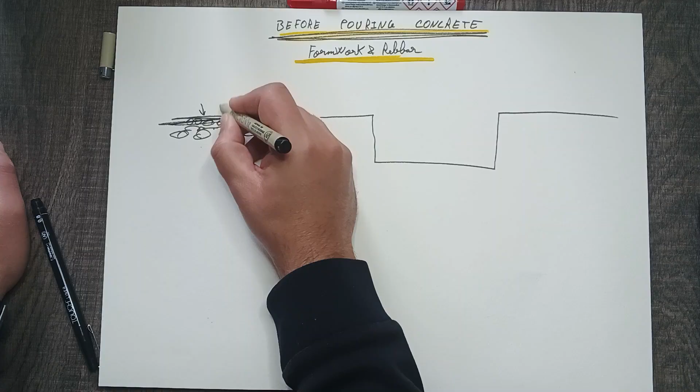After completing the excavation and reaching the required level, the soil must be properly compacted. A well-compacted soil provides a stable base for the foundation, reduces settlement, and prevents future structural problems. Only after checking the level, density, and cleanliness of the soil can we safely start with foundation works.

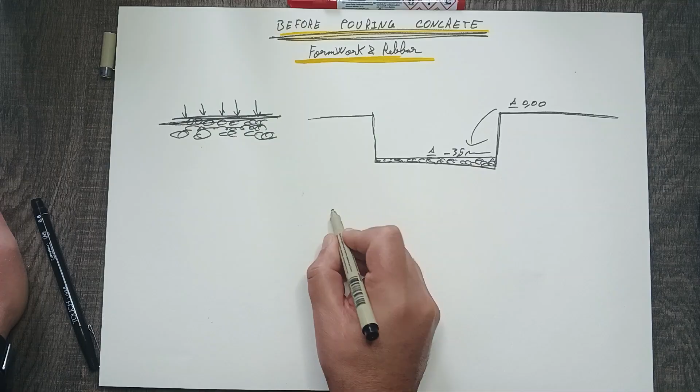This plan is composed of a main entrance that leads directly to the living area, which acts as the central space of the house. Near the entrance, we place the guest WC for easy access without disturbing the private zones.

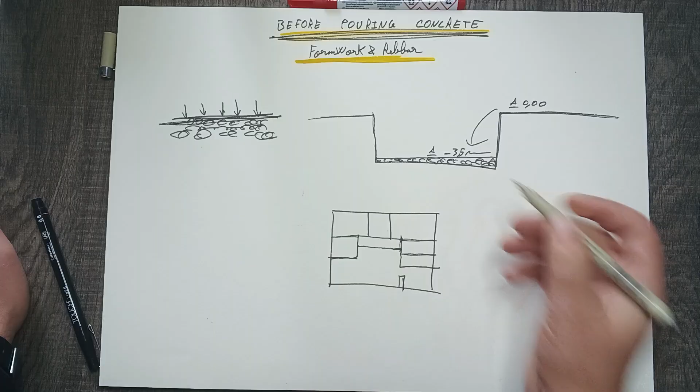A storage room is positioned close to service areas to improve functionality and circulation. The bedrooms are located in the private zone of the plan, away from noise and public spaces, ensuring comfort and privacy.

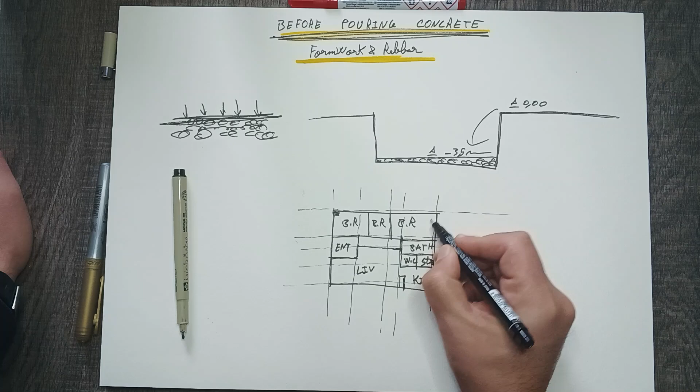From a structural point of view, the column layout is a key element in this plan. Columns are positioned to align with walls and functional spaces, avoiding interference with circulation and room usage. Their placement follows a clear structural grid defined by axes.

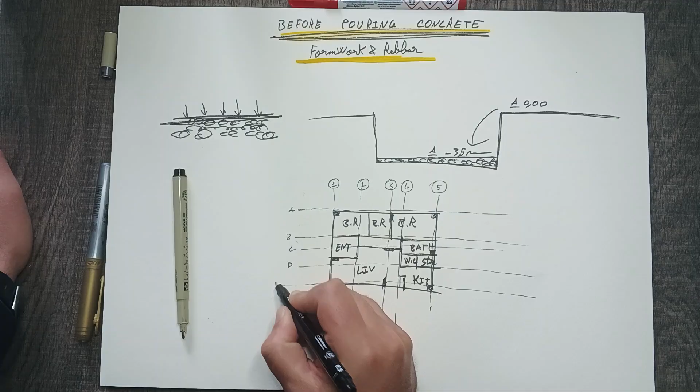These axes organize the plan, control spans, and ensure that loads are transferred efficiently from slabs to beams and down to the foundations. Respecting column alignment and axes is essential during the structural phase. Any change can affect stability, increase costs, and create execution problems on site. A well-coordinated architectural and structural plan guarantees safety, efficiency, and long-term performance of the building.

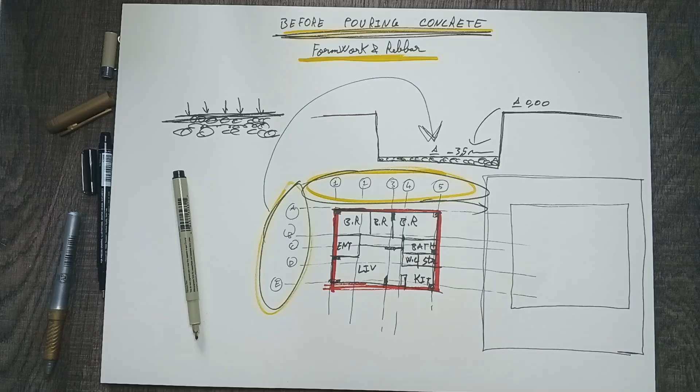Before starting the structural works, a topographer must come to the site. His role is to transfer the axes from the approved plans onto the ground with high accuracy. These axes define the exact position of columns and foundations. Correct axis setting avoids execution mistakes and ensures the structure is built exactly as designed.

On site, one simple formula helps us check if our axes are correct: A squared plus B squared equals C squared. This formula, known as the right-angle rule, allows us to verify that the angles between axes are exactly 90 degrees.

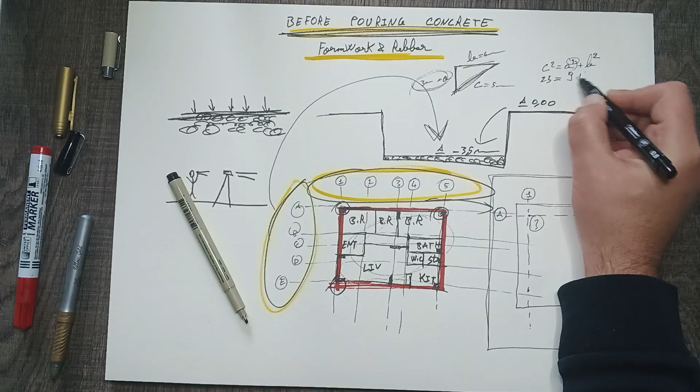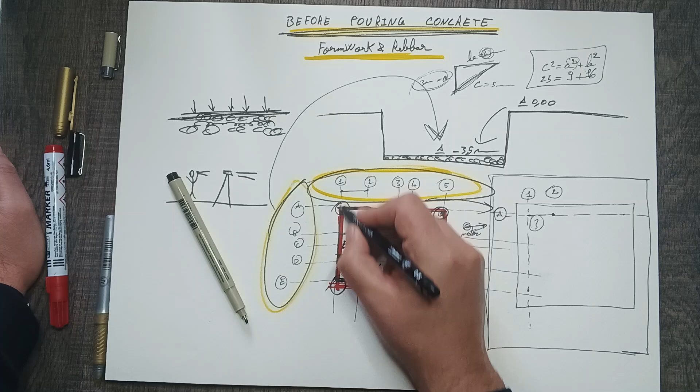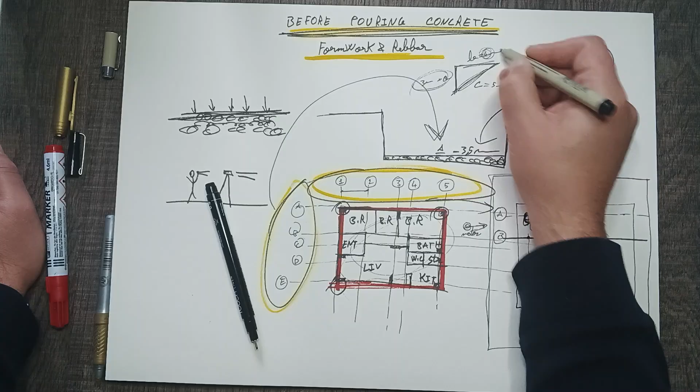By measuring the two perpendicular sides and then the diagonal, we can confirm accuracy. If the calculated and measured diagonal match, the axes are correct. This step ensures the building is positioned properly on site and prevents alignment problems during construction. Axes guide the exact position of columns and walls, ensuring the building is correctly aligned and stable.

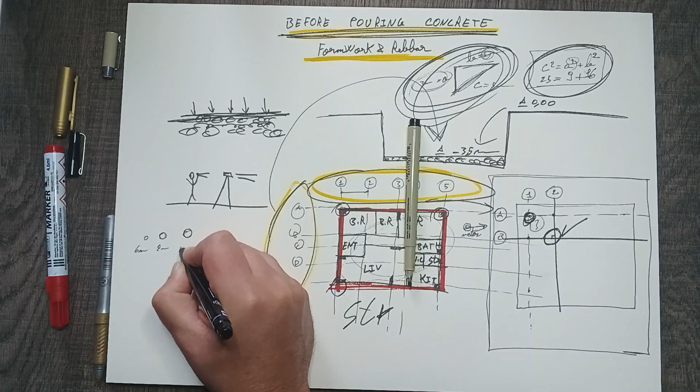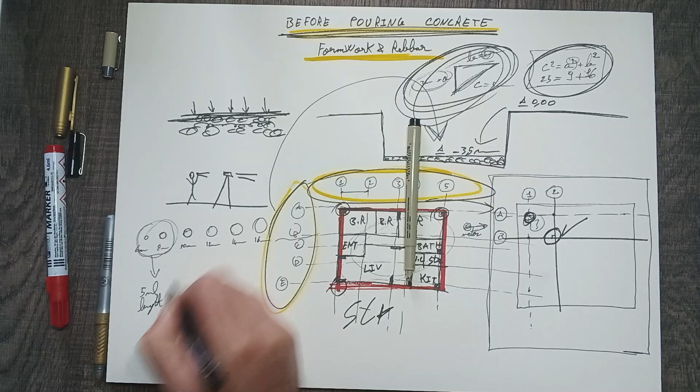In reinforced concrete, the thickness or diameter of the iron bar directly affects the strength of the structure. Each bar diameter has a specific weight per linear meter, and this is why we always refer to the steel weight chart. Using this chart helps us calculate total steel quantity, control cost, and ensure the reinforcement matches structural design requirements accurately.

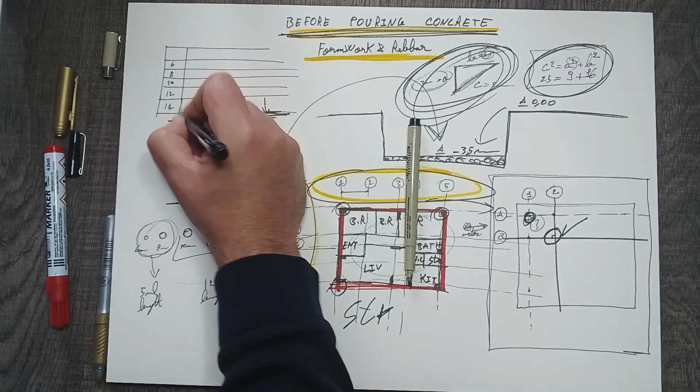For example, an 8mm bar weighs about 0.395 kilograms per meter, while a 12mm bar weighs around 0.888 kilograms per meter.

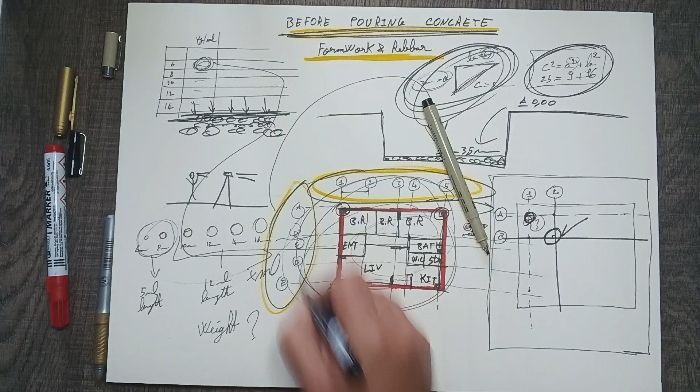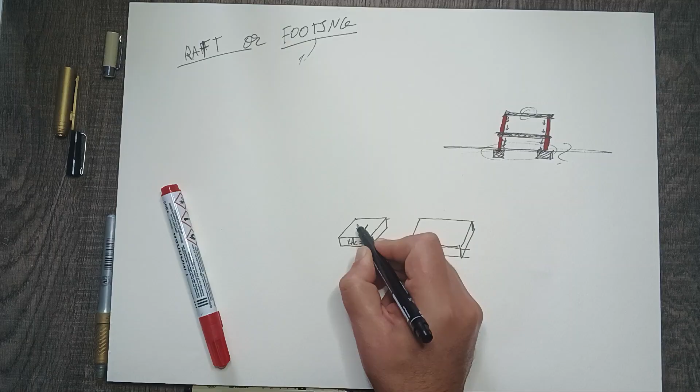Before comparing raft and footing foundations, let's start with a short introduction to footing foundations. A footing foundation is a localized foundation system where loads from columns or walls are transferred directly to the soil through isolated footings, combined footings, or strip footings.

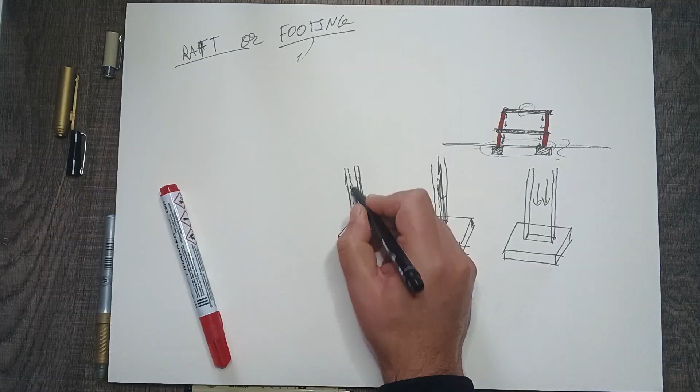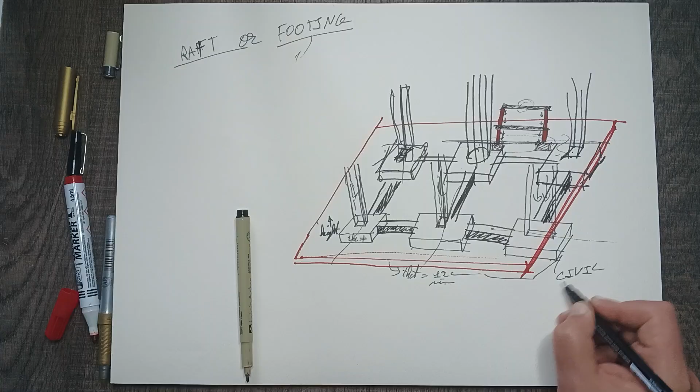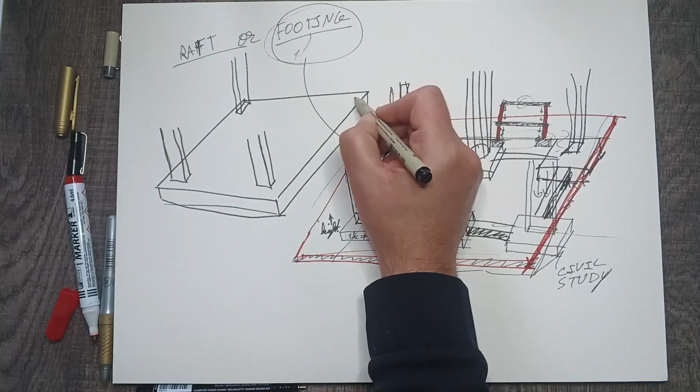Now, let's move to raft foundations. A raft foundation is a single large concrete slab that covers the entire building footprint, instead of transferring loads through individual footings. The raft spreads the loads of all columns and walls uniformly over the soil.

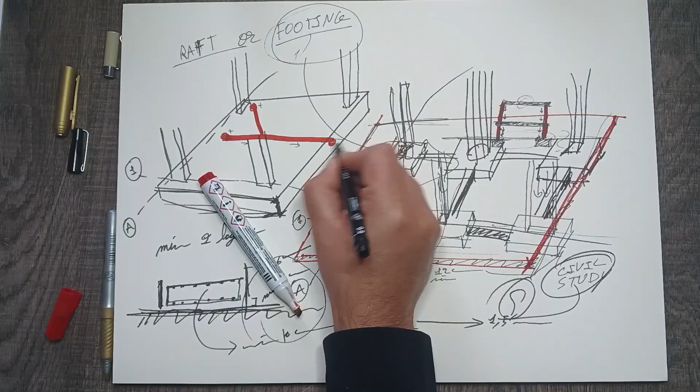Reinforcement is placed both at the top and bottom of the slab to resist bending moments. The concrete cover at the bottom protects steel from soil moisture, while the top cover protects it from weather exposure and ensures durability and structural safety.

After the excavation is completed and the required level is reached, gravel filling starts. The gravel is placed in layers, usually not exceeding 20 centimeters, and each layer is properly compacted to achieve good bearing capacity and avoid future settlement. This process continues until the final level is achieved.

Before starting any concrete works, a clean concrete layer of about 10 centimeters, known as blinding or lean concrete, is poured. After pouring the clean concrete layer, the horizontal waterproofing membrane is applied. This layer is very important because it protects the raft foundation from ground moisture and water penetration.

Once waterproofing is completed, reinforcement works start. The bottom iron bars are installed first, following the structural drawings with proper spacing and concrete cover. Then the top iron layer is placed to resist negative bending moments.

After that, column starters and wall reinforcement are fixed and accurately aligned. Before concrete pouring, we ensure the iron cage has sufficient concrete cover from both the top and the bottom. This cover protects the steel from corrosion and guarantees durability and structural performance of the raft foundation.

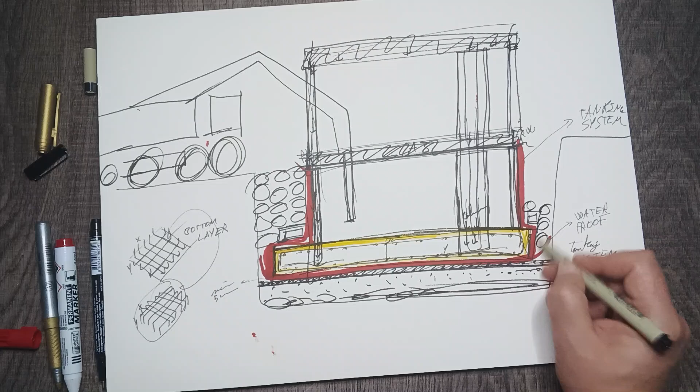After finishing the waterproofing works, construction continues with column execution, and then the ground floor slab, ensuring the building is fully protected and structurally integrated.

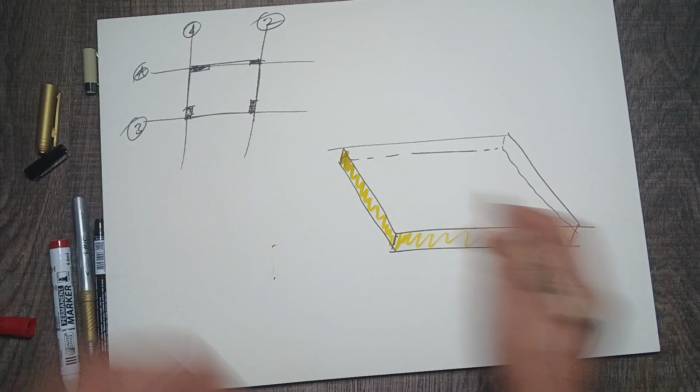We start slab execution by reading the structural plan and clearly identifying the axes on site, because accurate axes control the position of columns, beams, and slab spans.

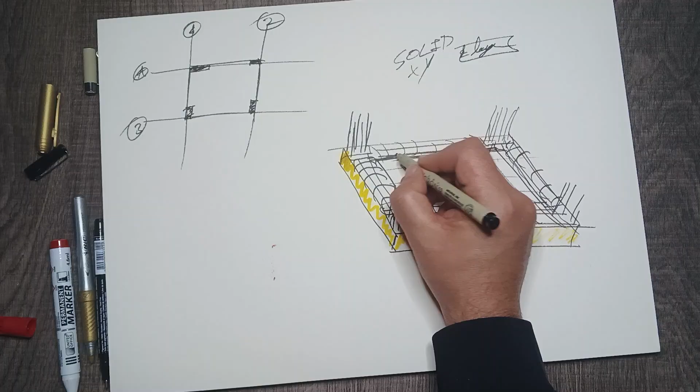Once the axes are set, formwork installation begins, ensuring correct levels, alignment, and support. After that, reinforcement works start, placing the rebars for beams and slabs according to the drawings, with proper spacing and concrete cover. Structurally, the slab works together with the beams to transfer loads safely to the columns.

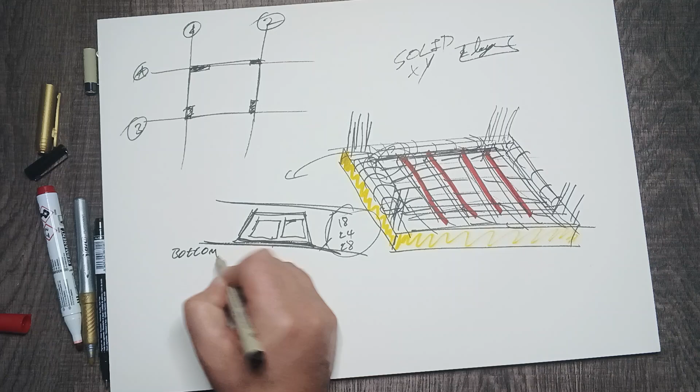In ribbed slab systems, also known as nervure slabs, the load is carried by concrete ribs while reducing the self-weight of the structure. Hordi blocks are placed between the ribs as non-structural elements, mainly to reduce concrete volume and overall weight. A minimum concrete topping of 6 centimeters is poured above the hordi blocks to create a solid slab.